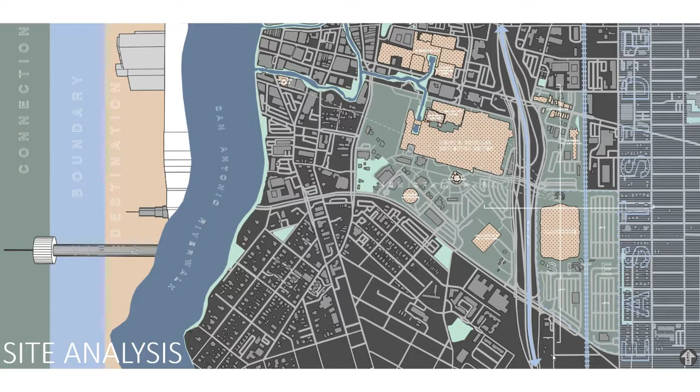The major destinations around my site help me identify which buildings help define San Antonio's skyline and the angles they are visible from. The major buildings identified from my site into downtown include the Tower of the Americas, the Henry B. Gonzalez Convention Center, major hotels, and the Tower Life Building.

I then began by identifying hardscape versus landscape and how the site can evolve to incorporate a park rather than the existing parking lots. I use key angles of views towards buildings to create pathways in my park.

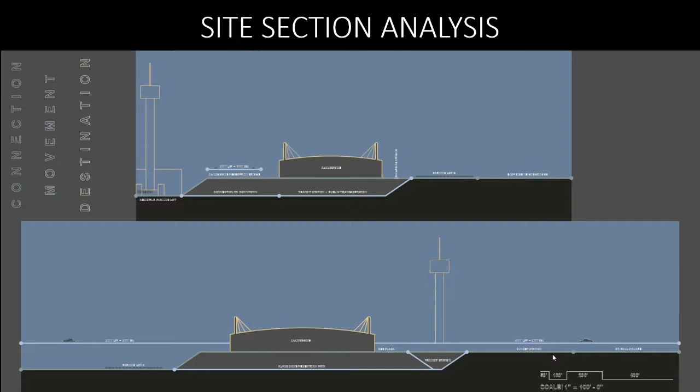The section through the site diagrams the different points of connection, movement through my site, and the destinations they lead to. For the program of the stadium, I began by identifying the kinds of spaces needed for a stadium, a park, team facilities, public facilities, and maintenance spaces, then analyzed the amount of space required for each program.

I diagrammed the size of each space, how they pertain to one another, and the importance of each function according to program.

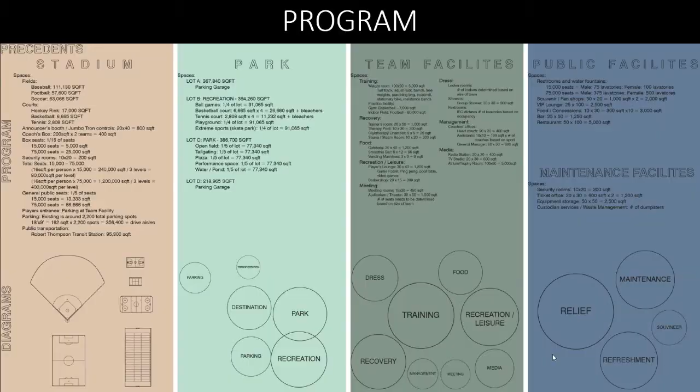From here, I derived my concepts. After background research, I found three concepts that would help guide my design for the rest of the project: intermobility, structural modularity, and field of vision.

Intermobility: the connection of mobility around, through, under, and above my site through different modes of transportation such as car, bus, train, and pedestrian routes. This has been achieved through the creation of a bus station, train station, a parking garage, and land bridges that connect the park on the east side through my structure to Hemisfair Park in downtown.

Structural modularity: the megastructure is a building that houses many different functions, is modular through the repetition of structure, and provides the framework for the building to grow and expand through the continuation of this repetitive structure. The structure in this project responds to the angle of seating within a stadium, which ultimately dictated the form of my building.

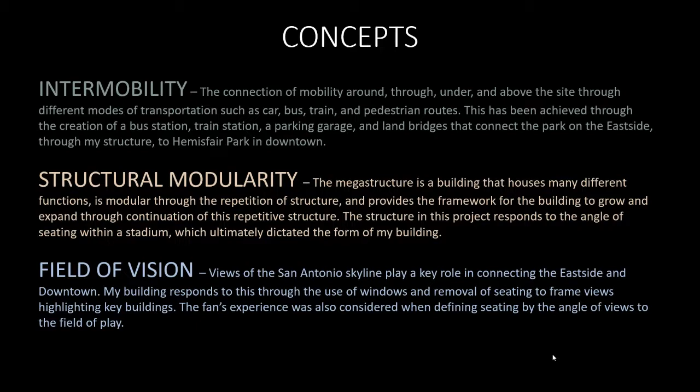Field of vision: views of the San Antonio skyline play a key role in connecting the east side and downtown. My building responds to this through the use of windows and removal of seating to frame views highlighting key buildings. The fan's experience was also considered when defining seating by the angle of views to the field of play.

The main idea of my site plan is to provide the east side neighborhood a public park through the elimination of the existing parking lots. I accommodated this by creating a leveled parking garage on the south of my megastructure.

The new park is divided into open fields and entertainment space to the north and recreation spaces to the south. The north side of the park provides ponds, an informal plaza, and an outdoor amphitheater. The recreational activities to the south include tennis courts, basketball courts, sand volleyball courts, soccer fields, and a baseball field.

I also focus heavily on the connection of the new park to Hemisfair Park downtown. I accomplished this through the creation of land bridges and pedestrian bridges that lead to and pass through the stadium.

Another major focus for the site is to promote the use of public transportation. I accomplished this by creating a bus station on the west side of the first floor and a train station to the east, with pedestrian routes running through the middle.

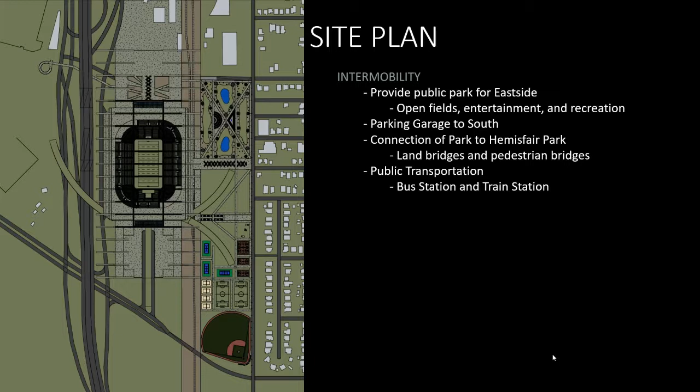Evident in the floor plan is the use of repetitive structural columns on the east and west of the structure that dictate the form of the stadium and reinforce the idea of growth and expansion of the megastructure for future development. This plan recognizes three main entrances to the structure through the north, east, and south.

The plaza on the north was created by voids intended to frame views of major buildings on the San Antonio downtown skyline. The removal of seating on the northwest and southeast of the building, along with the use of transparent glass on the facade, provides optimal views of the downtown San Antonio skyline when in the stadium.

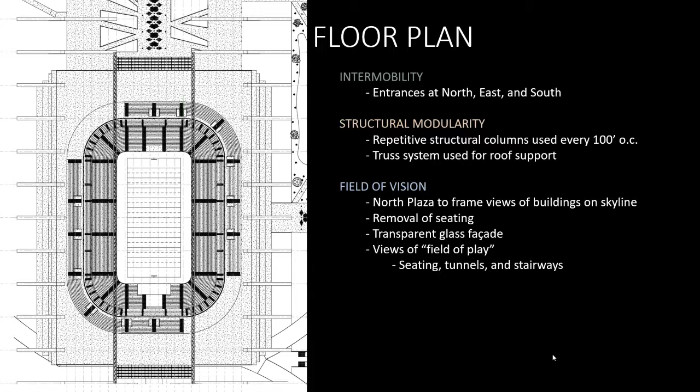Another major design task evident in the floor plan is a consideration for views of the field of play through seating, and tunnels and stairways leading to seating.

This axonometric section drawing clearly identifies the land bridge that was created to connect the new East Side Park, the stadium, and Hemisfair Park downtown. Also evident in this image is the ramp leading from the East Side neighborhood to the stadium.

Pedestrians will travel through the park and underneath its train tracks, which will lead them to the transit center underneath the stadium. The structural columns and trusses that support the stadium are identified to emphasize how repetitive structural modularity was used to dictate the form of the megastructure.

The use of glazing on the facade describes the transparency through the structure, providing views to the San Antonio skyline, which is evident in the background.

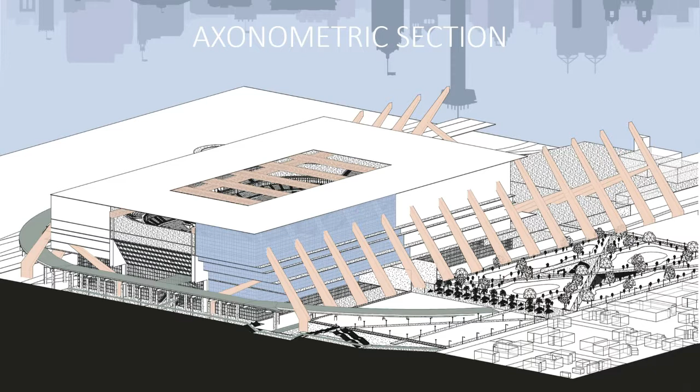This axonometric section recognizes intermobility by clearly identifying the train station, bus station, and the pedestrian path on the ground floor. This section is also successful in analyzing the views of the field of play provided by the seating.

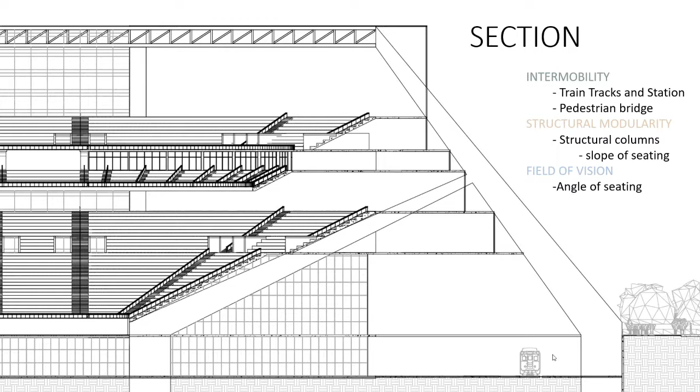This drawing is also successful at emphasizing the train running through the megastructure and the pedestrian bridge that connects the building to the park above the train station.

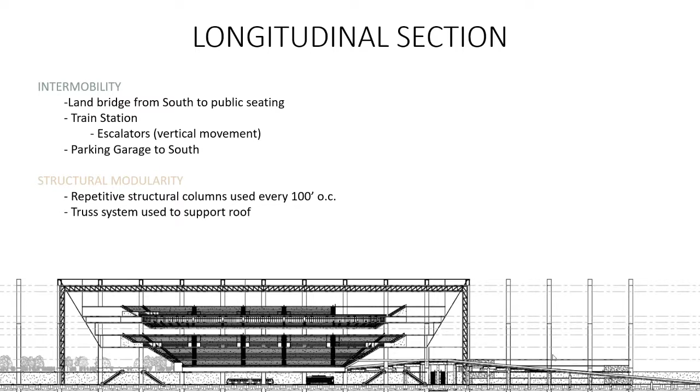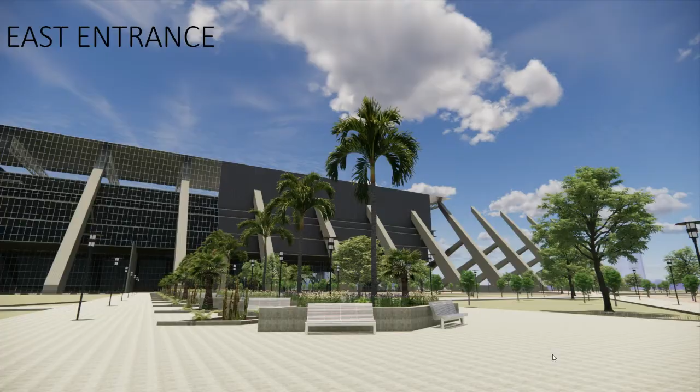Here's the east entrance from the East Side at the park.

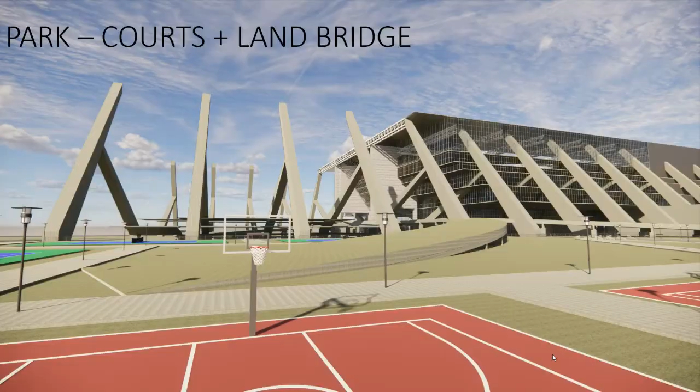Another view from the park, emphasizing the courts, then the recreation area, and also showing the land bridge that connects you to the stadium.

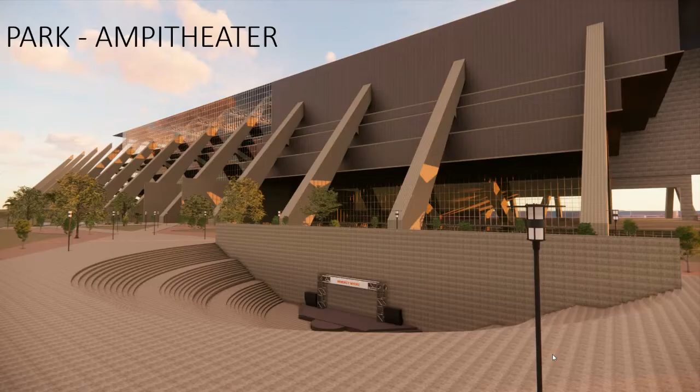The amphitheater that is in the park on the north side of the park.

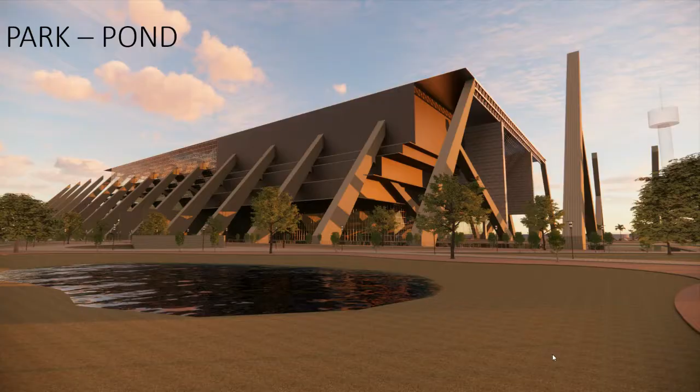The park and the pond with the view of the main facade of the building, the north entrance, the plaza, and the San Antonio skyline in the background.

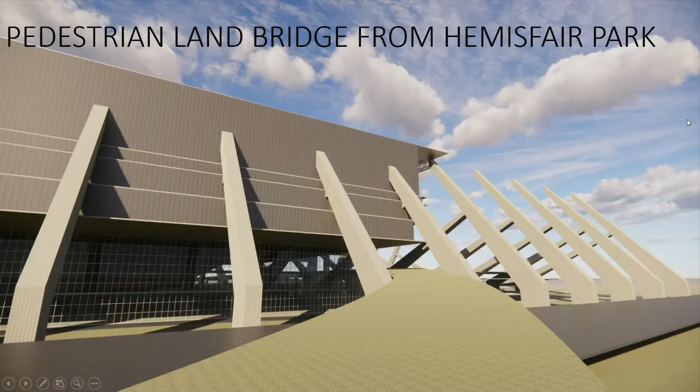This is a pedestrian land bridge coming from Hemisfair to the stadium over the highway.

This is the pedestrian land bridge from the East Side Park up into the south end entrance.

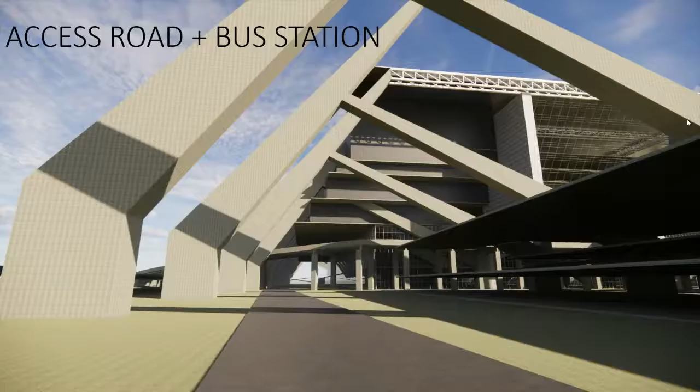This is showing the access road and the bus station. So you'd be driving on this access road, and up further ahead is the entrance to the bus station, which has a drop-off area.

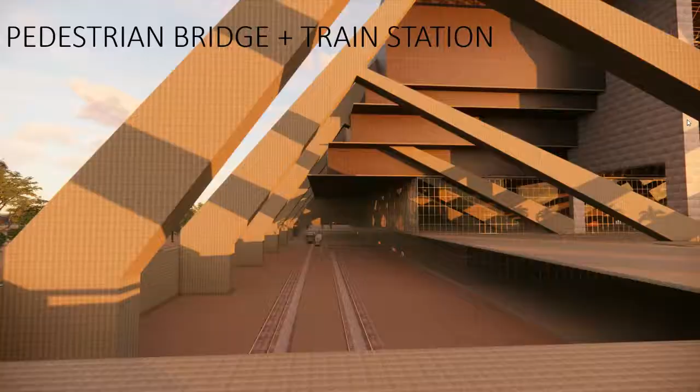This is showing a pedestrian bridge that crosses over the train tracks. Further ahead would be the train station with a platform for you to enter the train.

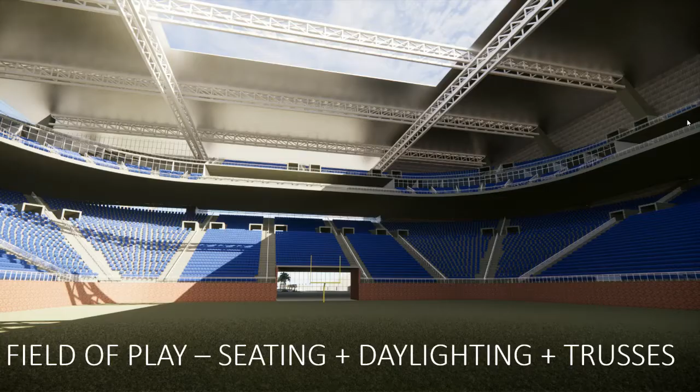And lastly, the field of play, showing how I emphasize seating and views to the field. Also the daylighting that would be accommodated in this space, and the truss supporting the structure.

In conclusion, I believe that through the concepts of intermodality, structural modularity, and field of vision, I've created a megastructure that provides a more inclusive and multifunctional stadium.